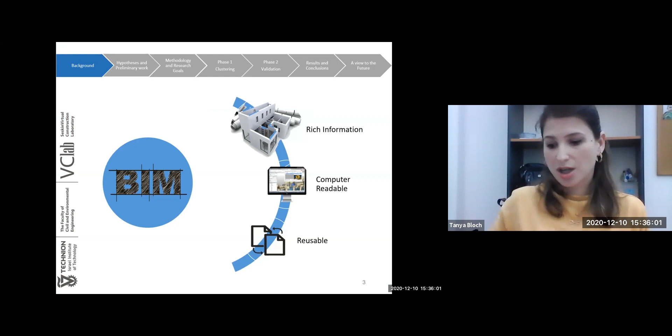And this is exactly why the Industry Foundation Classes schema was created, to enable us to make this exchange. And this is today the common way of sharing information in the industry. On top of that, we have the model view definitions, which are subsets of the overall broad IFC schema that are designed to fit a specific use, a specific workflow.

But the problem is that if the information is not explicitly represented in the model, then it can't be exported to IFC or to any other format for that matter. And so this information becomes information that we cannot reuse. And there's actually quite a lot of implicit information in any BIM model.

And here's an example. So this is a floor plan of a building. This is taken from a model of a building here in Tel Aviv. And we can quite easily see and understand that this is a residential building, that there are 6 apartments on this floor, that there is a single security room that serves this floor instead of, by the way, the common way for new construction in Israel, which is a shelter in every apartment.

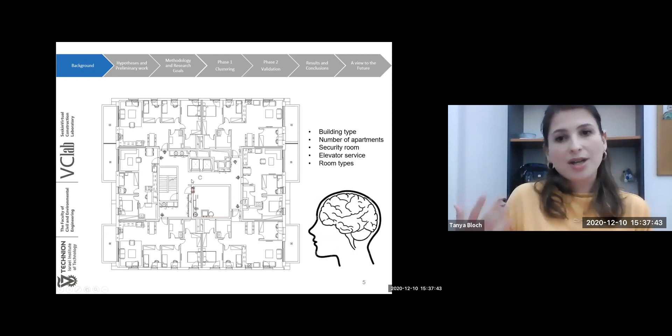But this information actually is not necessarily represented in my model. So if I create the space elements or not, this will look exactly the same to us. I don't have to create the spatial elements or the zones that define a single apartment, and still we understand that this is one apartment and this is another, and this is a public space, and so on. So we understand beyond what is represented in our model.

And if we look at this in the context of code checking, when we do it manually, we know and understand the requirements of the codes. We also understand both the implicit and explicit information of what is represented in the design in front of us, and we have the full picture, we have the complete information, and we can make a decision. But the computer can't do that, not yet anyway.

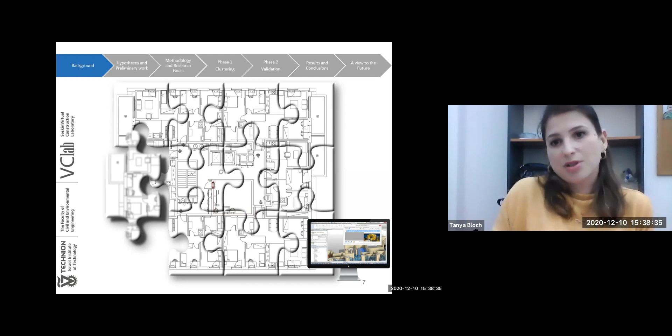So if the information is implicitly represented, then it's simply missing. It's a missing piece of the puzzle. And it's not the only one, because in many cases, even if we do explicitly represent information in the authoring tool, the representation may not match the requirements of the receiving platform. And so in terms of the receiving platform, this is yet again another missing piece of the puzzle.

And here's an example of that. So if I want to model the foundations for this building, I can either place a footing element in my model, but I can also just model a simple slab, define that it's made out of concrete, and put all the reinforcements in all the right places. And it will look exactly the same to us. And we will all understand that this is the foundation.

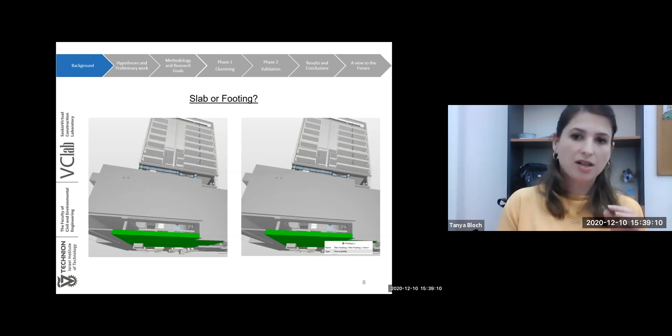But if my receiving platform, let's say a structural analysis platform, is expecting an IFC footing in the input IFC file, then I'm going to have a problem. So there is missing information and there is misrepresented information, and still we do have today functional commercial applications for automated code checking. One of the most known and advanced and used is the Solibri Model Checker.

Solibri is a rule-based application. It contains sets of rules that are based on the requirements of the International Building Code, and it receives an IFC file as input. Then the user can select which of the rule sets he wants to apply to his model, and he gets this very visual, graphical report of all the rejects that were found.

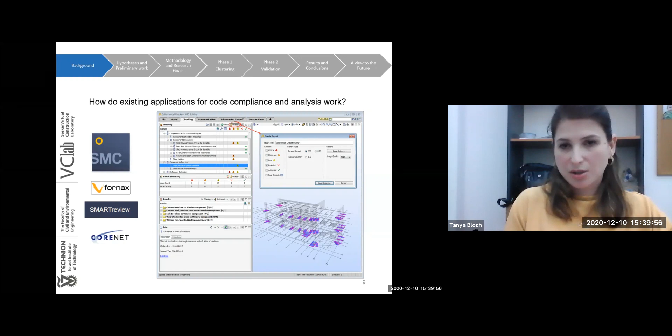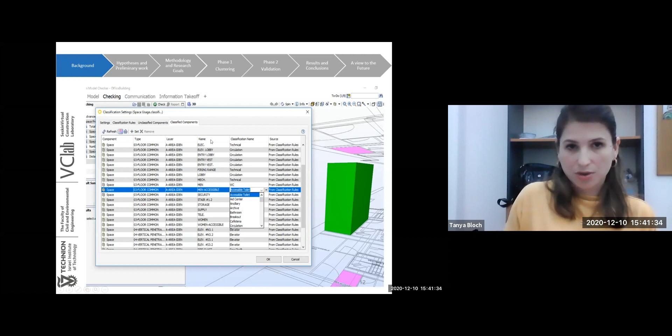And if we take a closer look at the space usage classification task, first of all, it makes sense. I can't check for the requirements of an accessible bathroom if I don't know which space in my model is the accessible bathroom. But in this case, the spaces were actually created and named and tagged in the authoring tool. The name column that you see right here, this comes from the input IFC file. But Solibri does not recognize men accessible. It only knows what accessible toilet is.

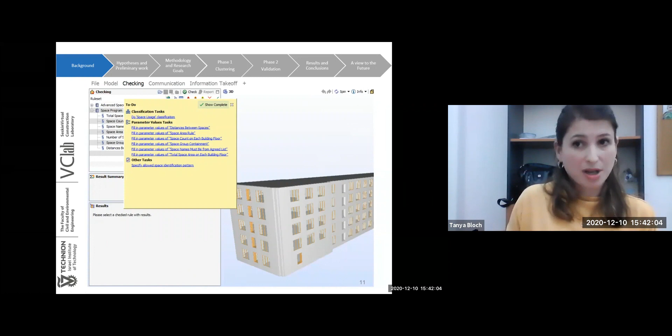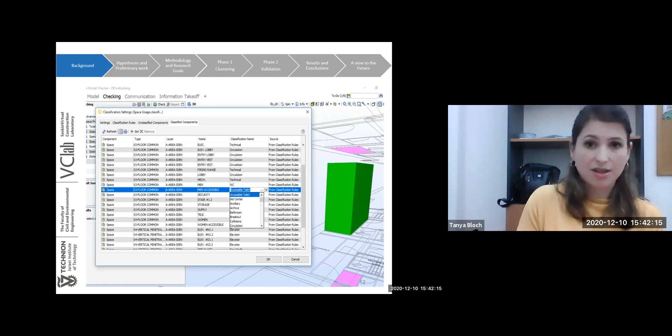So the user is asked to do this kind of mapping between the way that information is represented in the authoring tool to the way that Solibri is expecting it to execute the checking. And if you think of a large building with lots of spaces like this one, then this actually becomes quite a lot of work. And also taking you back to the situation I just showed you with the accessible bathroom, if I now need to go back to my model and make changes, that means I need to export a new IFC file, which means I need to go through this entire process all over again.

So this is actually true not only for Solibri, it's true for all the existing rule-based applications for automated code checking. And just in general, if we look at the process for automated code checking, it will usually contain 4 stages. So we have interpretation of rules, then we have the pre-processing of the BIM models, and then rule execution and reports. So interpretation of rules, this means that we need to translate hundreds of written documents into something that is readable to a computer. And this is a field of research on its own, and it's outside the scope of this work.

The second stage, pre-processing of BIM models, this is actually exactly filling in the missing pieces of the puzzle, supplementing all the required information so the checking can begin. And this is, as I showed you, done manually today, and it contains a lot of work. And so this is the point where we think that semantic enrichment can really benefit this entire process, because it offers a way to automate the stage. And by automating the stage, we may be able to get a higher degree of automation in the entire process of automated code checking, maybe even for a wider range of information.

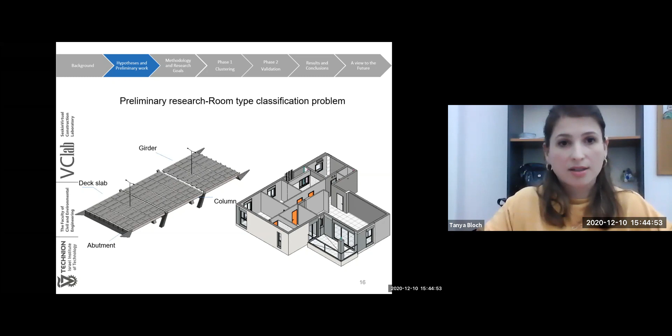But this is not the first classification task that was solved by semantic enrichment. I am referring to the SeeBridge project, where a model of a concrete bridge was obtained from point-cloud data. So the model did not contain any semantics at all. All it contained was geometry, and well, a beam didn't know it was a beam, and a column didn't know it was a column. And one of the tasks was to try and classify all those instances. So this was done by compilation of rule sets, but based on logical statements.

So one of the rule sets was based on the geometric features of every element that we expect to find in the model of a concrete bridge. And the second rule set was based on the relationships between those elements. So for example, we know that a deck slab will always be above the columns. Those two sets of rules were implemented in an engine called SeeBIM, which is a rule-based engine for semantic enrichment. And the result of this was correct classification of all the elements in the model of the bridge.

So naturally, I tried to do exactly the same thing with the room types, except for spaces, there are very few geometric features that can really distinguish between the different functional spaces, because a space is basically a box. So the spaces vary in size, they vary in the number of faces they're defined by, and those spaces can be either physical elements, such as walls, or they can be virtual boundary lines. But almost every rule that you compile based on those features will not lead to predefined fixed outcomes. For example, I can't say that if the size of a room is 12 square meters, then it is a bedroom. That will not always be true.

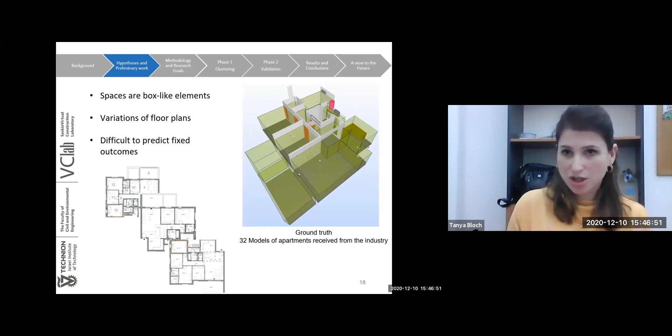And when it comes to the relationships between the spaces, it's the same thing here as well, because it turns out there's quite a lot of variety in the layout of a standard Israeli apartment. And my ground truth in this case was 32 models of apartments that I received from the industry, so that was quite representative. And here again, most of the relationships that we identified did not lead to predefined fixed outcomes. We ended up compiling 14 rules, based on the geometric features as well as the relationship features. And those rules were represented as matrices, just like it was suggested and implemented in the SeeBridge project.

So here is an example of such a rule: is room 1 always larger than room 2? And the values that you see here, the Y, that's a yes, the N is a no, the X is a maybe, that is sometimes yes, sometimes no. This is exactly the type of values that will not lead me to fixed outcomes, and you can see that the matrix is quite full of them.

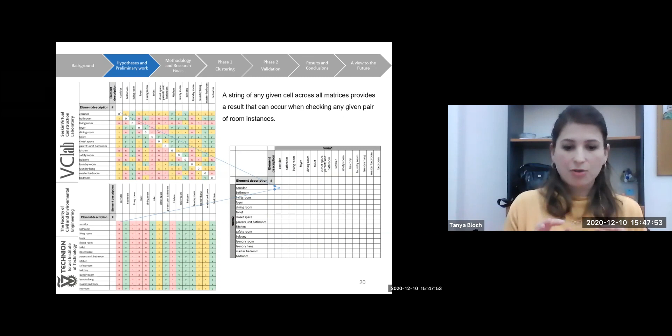Now, when you look at a single cell and you string together the values of that cell across all the 14 matrices, if you are able to identify a unique string, that would mean that you are actually able to identify, classify the elements that this cell represents. And as I said before, the X is sometimes a yes, sometimes a no. So this is not a unique value. So in the end of this process, we were able to only identify 5 such unique strings, which means we could only classify 5 functional spaces out of the possible 15 that we had represented in our apartments.

So I was looking for an algorithm that will allow me to represent all those maybes, all those X's, and still be able to classify all the 15 possible functional spaces. So I tried to solve the same problem using a machine learning algorithm, a supervised machine learning algorithm. In this case, an artificial neural network was used.

So the idea now is that I don't need to compile rigid rules. All I need to do is to provide examples, and I had my 32 models to compile a training set of examples based on them. So now, once this algorithm is trained on my data set, it should be able to generalize from the data set and to make predictions on new instances that we present.

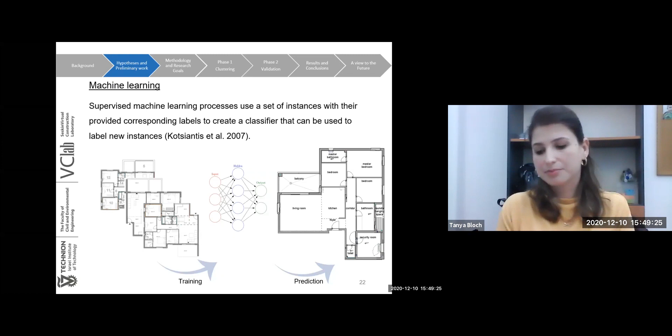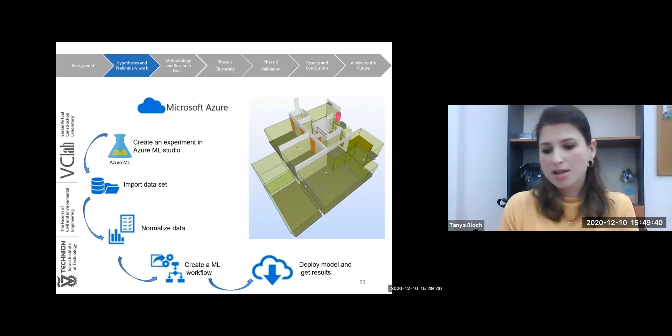This procedure was implemented in a platform called Microsoft Azure Machine Learning Studio, which is a platform that allows you to apply many different machine learning algorithms on a data set that you compile. So to compile the data set, as I said, I used the models of apartments that I received from the industry. I created the space elements, I labeled them, and then each space was assigned a vector of features. So here again, I used both the geometric features as well as the relationship features.

More specifically, the ability to directly access one room from another was used as a relationship feature and added to the process each time that the space was labeled. This iterative process was then applied to make predictions on 3 test cases, 3 apartments. And as you can see, the result of that was correct classification of all the spaces in all 3 apartments.

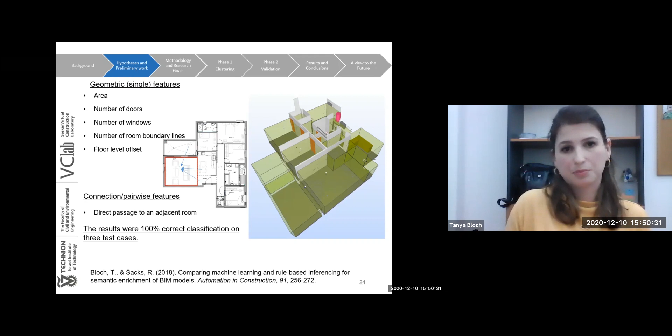I did also try to solve the same problem by graph representation. So since we understand the relationships between functional spaces will ultimately define the whole layout of an apartment, I represented each apartment as 2 graphs. So I had an adjacency graph and an access graph, and then the features could be extracted from those graphs, which means that eventually in my data set, every instance becomes a pair of spaces instead of a single space,

which carried quite a lot of problems with it. And you can also see that I could not get as good results as I did with the previous algorithm. So only 70% of spaces on a test case were classified correctly.

But this experiment led me to the conclusion and to the second hypothesis of my research, and that is that there are actually several types of information that we must supplement to enable automated code checking, and that each such type may require a different approach for inferencing.

So based on this, two research goals were set. One was to identify the different classes of semantic enrichment tasks that are defined by information that needs to be supplemented to enable automated checking, and then to match each such class with the most appropriate computational approach for solution.

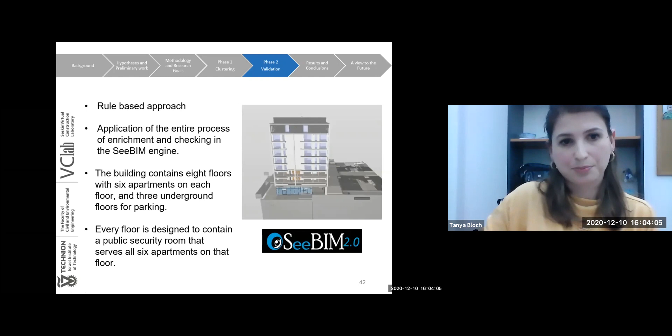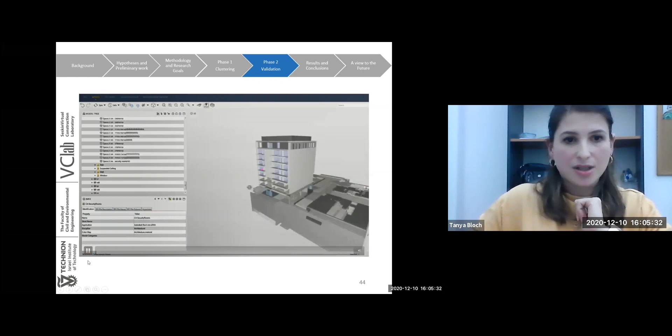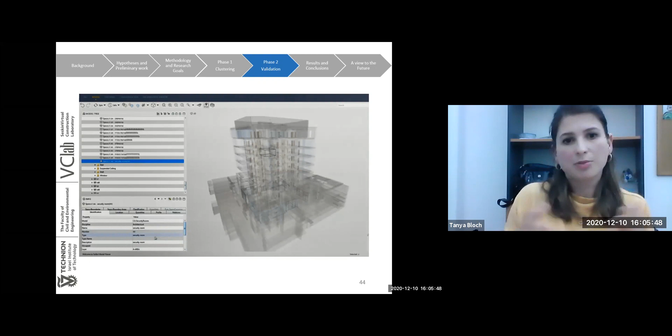You can see the entire process in this short video. So this begins with the input IFC file, just shown in a simple viewer. The spaces were actually created and classified before this experiment because this was not the focus of this experiment. Here are the walls of the security rooms. Now notice that, for example, the description field here is empty, and it's going to be filled with values. This as well is going to be filled with values after the model is enriched.

So this is imported to the SeeBIM engine, and here is the rule set that we compiled. And again, I remind you, the rule set contains all the rules for enriching the model, as well as the rules for checking the model. So the end result here will be pass or fail for every security room in the model. Here's an example of an individual rule out of the entire rule set.

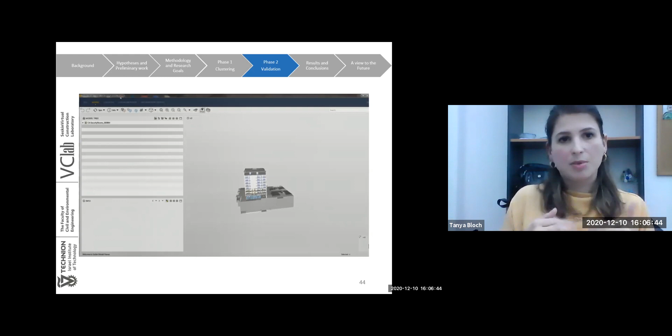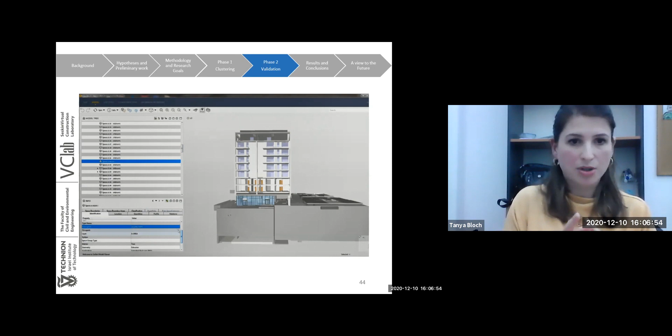And now, once this is done, SeeBIM actually creates a new IFC file, an enriched model, an enriched IFC file that contains all the information. You can see it right here. So now when you take a look at a security room, you can see that it's tagged as pass. So this specific security room is compliant to the requirement that we are dealing with.

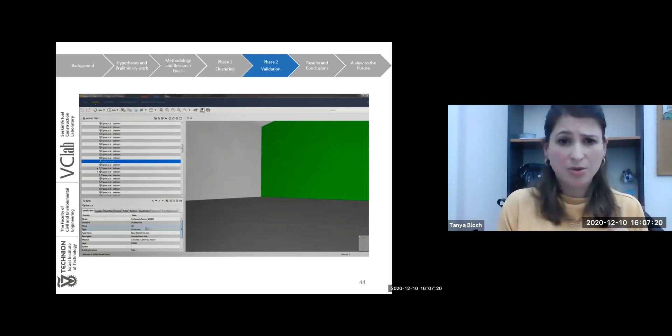For the walls, notice that now the description field is no longer empty. It contains the tag that connects the wall to the specific security room. And also the values that you just saw, and here you can see them again. Those are actually the endpoints of the supported cross-section from the wall below.

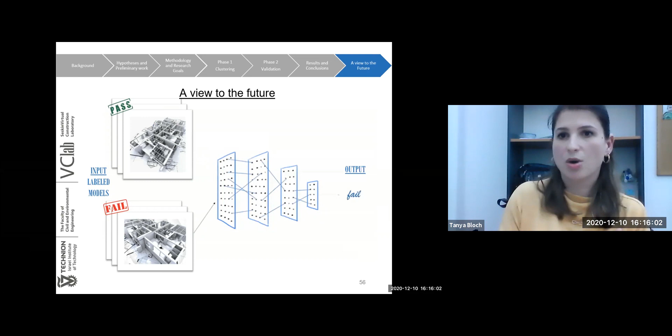So we did explore the idea of applying machine learning as the checking routine, not deep learning, just supervised machine learning. And we did this by trying to check models of security rooms for compliance to 16 conditions from the Israeli code for security rooms, all simultaneously. And so to do this, we had to train a machine learning algorithm. And we did this by creating an artificial data set of models of security rooms. Those models were actually extensively enriched, but they did not contain the final code test values for each of the 16 conditions that we wanted to check.

Now, once the algorithm was trained, it was applied to additional 20 test cases to make predictions. And the result of that was that we got correct classification of 18 cases out of the 20, only 2 false positives. So first of all, we can see that machine learning is indeed applicable as a checking regime for automated code checking. But we can also see that there's kind of a trade-off between semantic enrichment and automated code checking. So the more effort you put to semantic enrichment up until the point that you actually represent the final test values, then the checking becomes very simple. It comes down to a single if statement.